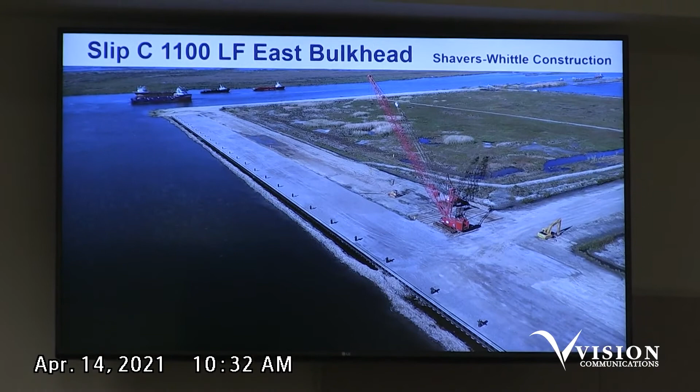First is our northern expansion, slip C, 1,100 feet east bulkhead, Picciola and Associates. Shavers-Whittle is the contractor. They're complete with the project, and we are complete with the lien period. We do have a clear lien certificate on the agenda later for approval, and that'll close out the project.

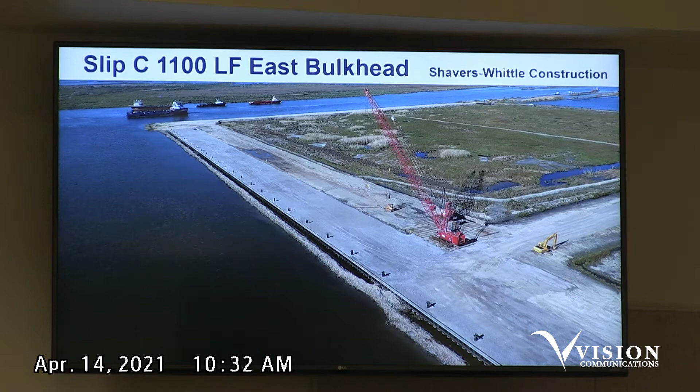Any questions? Okay, northern expansion slip C, 1,500 feet east sweep dredging. Magnolia Dredge and Dock is the contractor. We've given them a notice to proceed on Monday, April the 5th. They have started to mobilize on site, moving some dredge pipe in, and they've done their surveying, and they expect to start dredging within the next couple of weeks. The dredge is there this morning. Any questions on that?

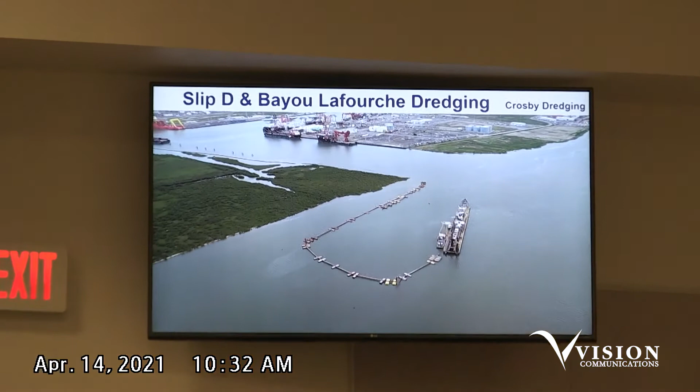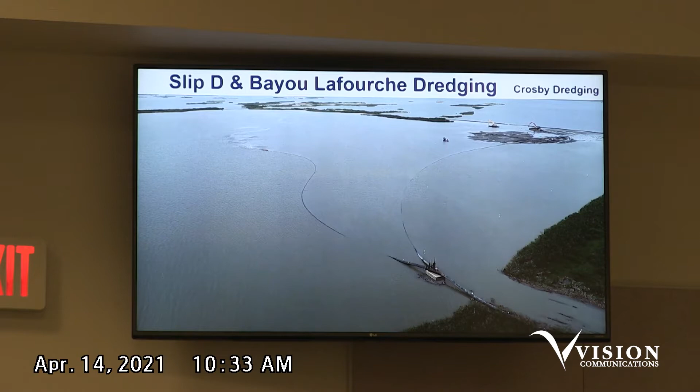Thank you, Joe. Northern expansion slip D and Bayou Lafourche dredge project, GIS Engineering. The contractor on this project is Crosby Dredging. As you can see, they're dredging in the Bayou Lafourche area right now. They've got the first 1,000 feet done. This is a picture of the disposal area. As you come right into the disposal area, they have split the line into two places to be able to better control where they deposit their material. Right now they're depositing it mostly on the right, but in that particular picture they happen to be disposing it about on the left. This is where it's starting to pile up. You can see they've got a couple of marsh buggy excavators moving the material back and forth.

So in Monday night's committee meeting, you had stated they brought in a larger dredge? Yes. All right, thank you. And they had always planned to do that, they just did it a little sooner than they expected. All right, further questions? Thank you, John.

Northern expansion GLF 626 site improvements, Angelette Picciola. This is the Schlumberger site. This project is going to start advertising for bid today, with the bids being accepted on May the 10th. We have a base bid, Zone A, which is estimated at about $1.7 million, and we have 3 alternate bids at Zone B, C, and D, each with an estimated cost of about $675,000. Any questions?

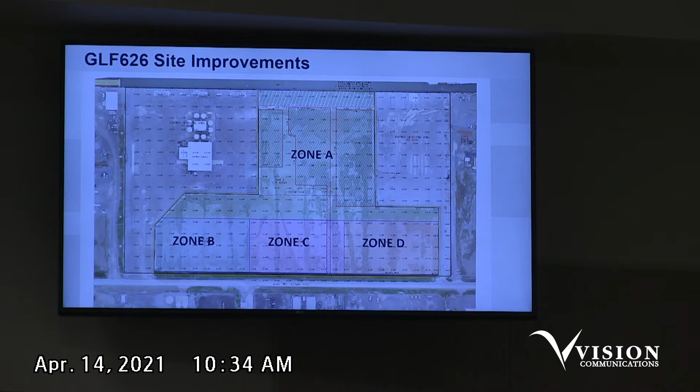Thank you. Moving on to airport projects. Davey Bro, give us an update on aircraft operations. The operations for the month of March were 1,627 operations. Passengers were 8,048, and vehicle count was 21,938. So vehicles are starting to move and operate out there.

All right, and the Airport Connector Road and Bridge, Picciola and Associates.

Yes, Sea Level Construction was the low bidder on the project. We're still going through contracts with DOTD and the contractor. I've been told that the contractor has submitted their contracts back to DOTD for review and approval, and then it'll come to the port for signature.

I think we got, was that what was sent to the wrong address? I know we just got a different DOT agreement. Oh, okay, different DOT. We have a lot of them. I was just wondering, we got a message this morning that something was sent to the wrong address. But once we get that done, then we can start our normal progression of work.

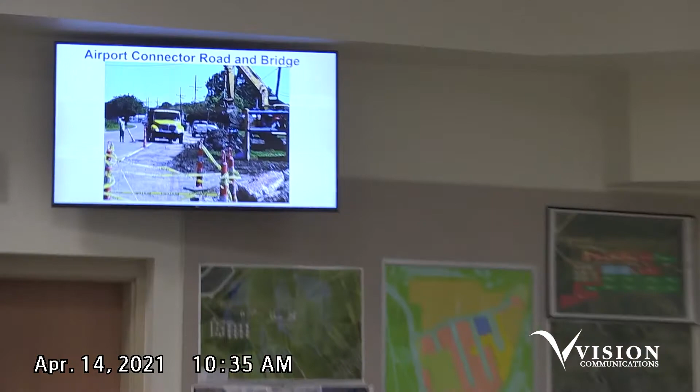Okay, great. Thank you. And just for the public, you'll see some water line work taking place out there. That's the Lafourche Parish Water District doing their utility move for this project. We should see construction start around the end of May, early June timeframe.

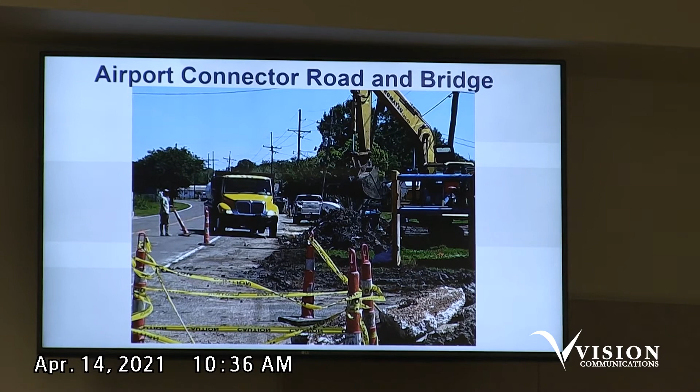Good. All right, moving on to other projects, the Tidal Creek Bridge and culvert improvements.

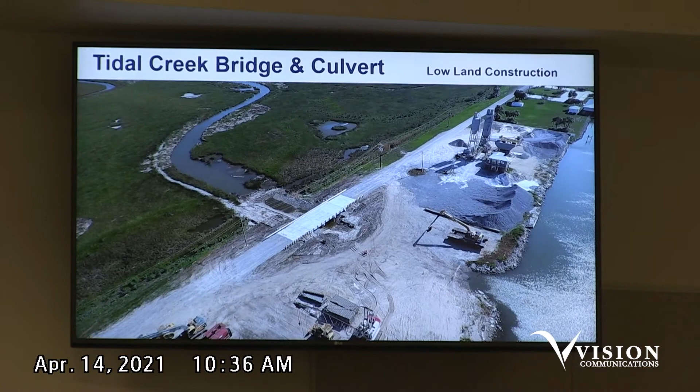Low Land Construction is the contractor for this project. They completed the kayak launch area and they're working on the Tidal Creek Bridge. They're kind of wrapping that up now. They've already dug the Tidal Creek all the way to Flotation Canal and placed the mats in place. So they're doing cleanup work and also dressing up the site. In the next week or so, they should be complete. All right, good deal, thank you.

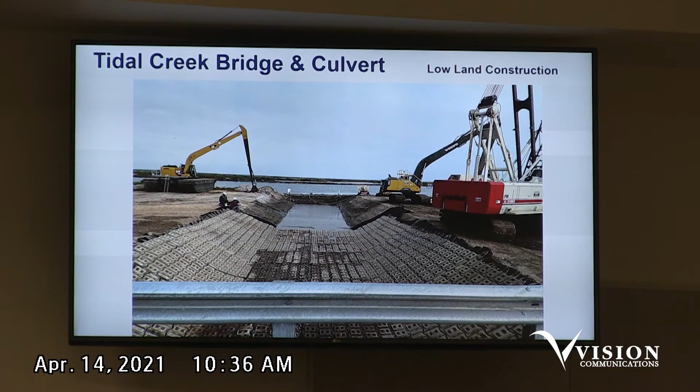Questions? Thank you. Front Marina Boat Shed and Lift, GIS Engineering.

The contractor on this project is Picciola Construction. They've been on hold for the last month waiting on material. They did finally get that material on Monday and have started progressing on building the roof of the structure. Good deal. So again, we expect them to be finished by the end of the month. End of the month? Okay, great. Thank you.

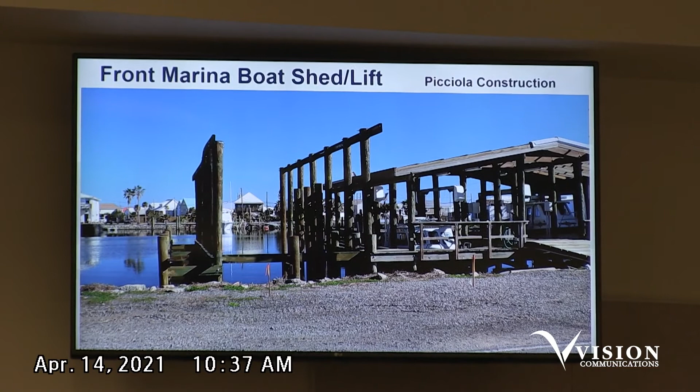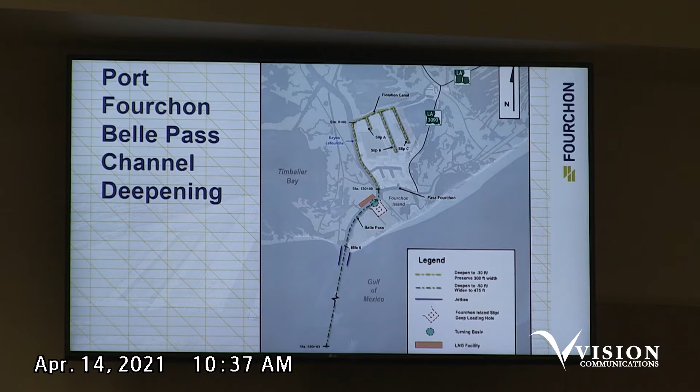Port Fourchon Belle Pass channel deepening: we are continuing to work with the Corps of Engineers, mainly the district office, as they're working to finalize getting some funds moved over to our project so they can give us an idea of how long it'll take to get us to the finish line so this can be fully approved to go to 50 feet. We've also applied through the federal government, through Congressman Scalise's office, for what used to be called earmarks—I think it's called community project funding nowadays. We applied for and requested $900,000 of federal funds to go toward that project, because if you recall, that's what the Corps of Engineers said—it's going to be difficult for us to move forward without federal dollars into that. So that's what we're trying to accomplish so we can continue moving the ball forward on the deepening. Any questions on that?

Okay, motor vessel Harvey C's removal. Bryce has been working with them on that. Later on the agenda, you'll see we have an access agreement to approve. That access agreement is actually with Harvey Gulf and McKinney Salvage, who's their contractor that's going to salvage the vessel. In terms of the overall project, we had a meeting about two and a half weeks ago with the permitting agencies. Harvey Gulf's moving forward with getting whatever regulatory approvals they need. So once that's completed and the access agreement is all ironed out, I would expect that they're going to start work. Any questions? All right, thank you.

Bayou Lafourche Mooring Dolphins, Angelette Picciola. On this project, the plans and specifications are being submitted this week to the port for review, and then we'll begin advertising for bid. We have a base bid on the demolition of an estimated $398,000, and we have an alternate bid to rebuild two of the dolphins with a total estimated cost of $130,000. Is that a piece or for both? That's total, so our estimate is about $65,000 a piece. Thank you. Okay, thank you.

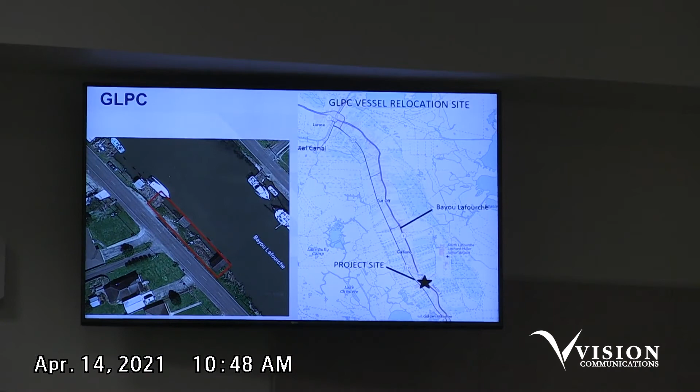This is an extension of the permit initiation period. Next is Greater Lafourche Port Commission, a proposal to install 2 pile mooring clusters, refurbishment of 1 existing 16-foot by 14-foot wharf, and construction of 1 14-foot by 14-foot wharf. Approximately 83 cubic yards of riprap material will be hauled in and placed upon an area measuring 142 feet by 4 foot along the right descending bank of Bayou Lafourche. Approximately 0.02 acres of unconsolidated water bottoms may be impacted as a result of this proposed activity.

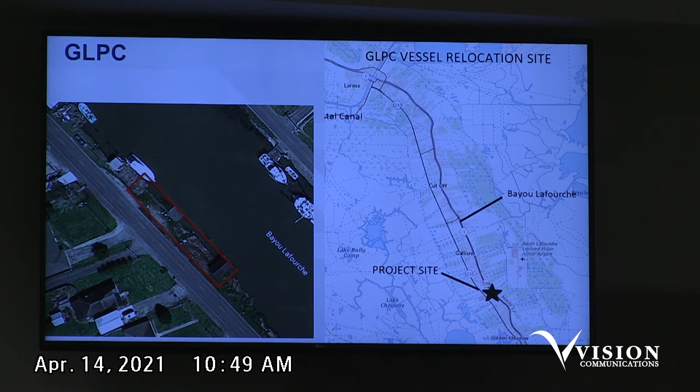Lastly, we have S2 Energy Operating LLC, a proposal to dredge a 1,200-foot long, 70-foot wide channel for installation of 2 40-foot by 40-foot 4-pile platforms, and install 1 proposed 2-inch, 1 proposed 3-inch, 6 proposed 4-inch, and 1 proposed 10-inch pipeline from those platforms to tie into existing pipelines and platforms. The total length of the proposed pipeline is approximately 24,000 feet. Approximately 20,000 cubic yards of native material will be excavated and placed on site. In addition, 135 cubic yards of sandbag will be placed on site at a pipeline crossing. Approximately 16 acres of non-vegetated water bottoms may be impacted by this proposed activity. And Mr. President, that concludes my report for permits and waterways.

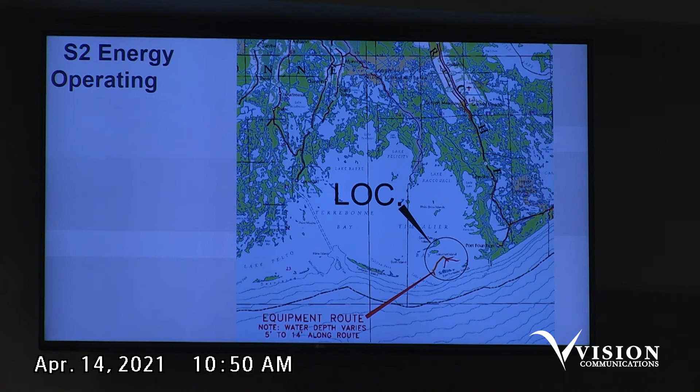Thank you, Mr. Pierce. Getting out of permits and waterways, going to construction and development. Committee members are Larry Griffin, Chairman, Chris Colley, Jim Lafont, Chucky Sherman. Mr. Griffin: thank you, Mr. Chairman.

Next is consider accepting the clear lien certificate for slip C, 1,100 feet east bulkhead, for Shavers-Whittle Construction. This project is fully complete. Recommendation to approve. I need a motion. Moved by Mr. Griffin, second by Mr. Ardorn. Any discussion? Any public comment?

All in favor? Aye. All opposed? Motion passed. Next is consider approving the FAA Airport Coronavirus Relief Grant.

As part of the second or third coronavirus relief package that the federal government passed, the airport is receiving $23,000. Recommendation to approve this agreement.

Need a motion? Moved by Mr. Rodney Gisclair Sr., seconded by Chris Collier. Any discussion? Any public comment? All in favor? Aye. All opposed? Motion passed.

Okay, Mr. President, I'm sorry it took me so long to present my committee, but I promise to make it shorter next time. Thank you, Mr. Griffin. You're welcome.

Now we're getting out of construction and development, going into finance committee. Members are John Melancon Jr. as chairman, Rodney Gisclair Sr., Mike Colley, and Chucky Sherman. Mr. Melancon, your turn. Good morning, and thank you, Mr. President.

Unfortunately, Mr. Griffin, the finance report will be a little bit longer. So we'll begin by considering approval of payment of the March 2021 invoices and recognizing those over $10,000. We'll begin with item 1, Crosby Dredging, LLC, $451,541.87, for dredging of Slip D in Bayou Lafourche.